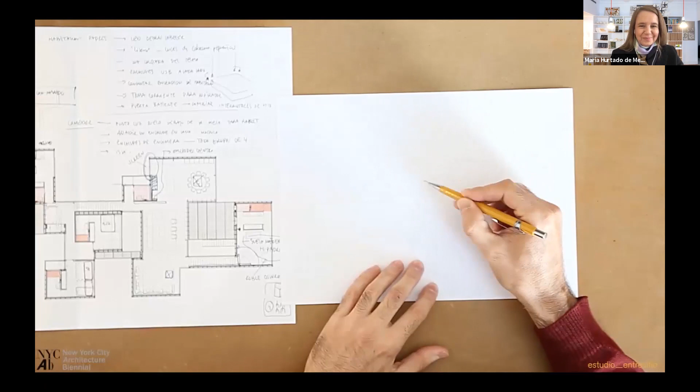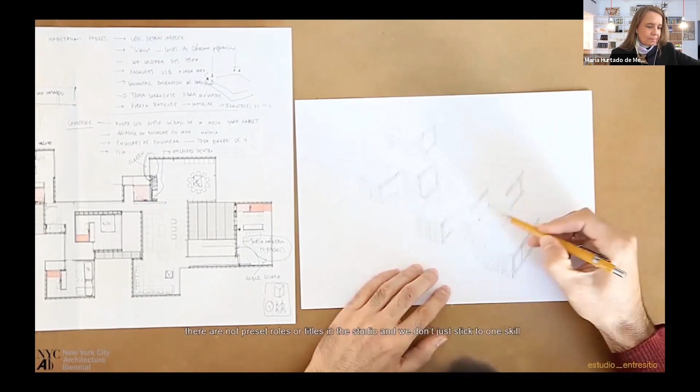Our creative process is non-linear. A common saying around here is that each one is better at doing what they enjoy. There are no preset roles or titles in the studio, and we don't just stick to one skill or way of doing architecture, but embrace all the diverse options the team brings to the table.

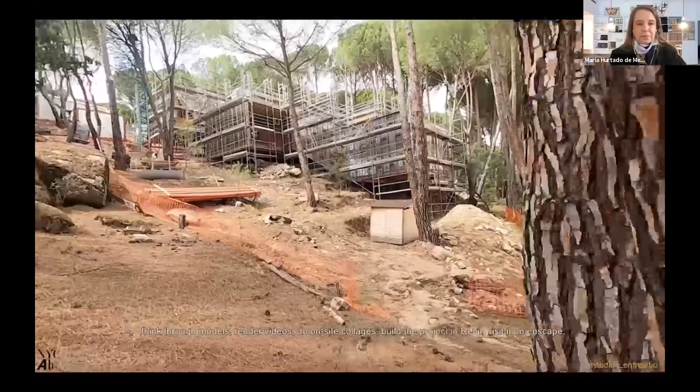We sketch by hand in AutoCAD, check spaces in Rhino, tinker with Grasshopper for complex patterns, think through models, render videos, do on-site collages, build a project in Revit, visualize in Enscape, paint with watercolors, supervise the construction site, check the works, draw again, start and repeat, iterate, think, dream, build.

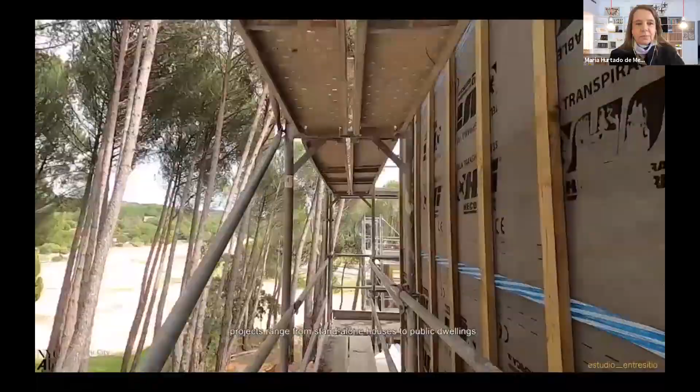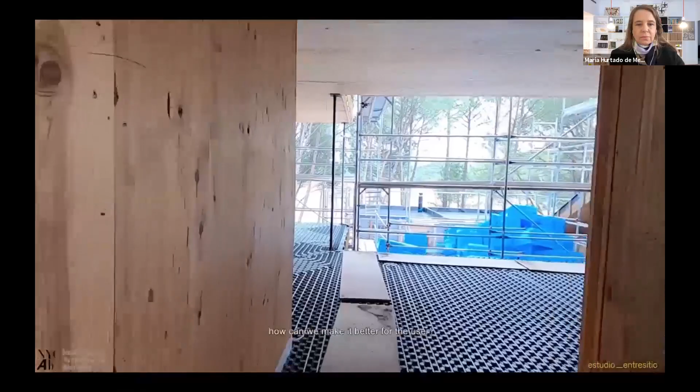Projects range from standalone houses to public dwellings, healthcare centers, social and transportation hubs, and museums. But no matter what we are designing, the principles are usually the same. How can we make it better for the user? How can everyone who uses our building feel welcome in it, as we feel welcome in Madrid? What is the extra thing that we are providing when solving the problem?

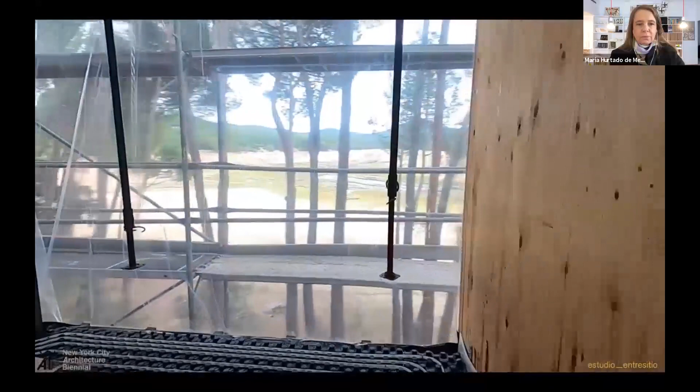We spend a lot of our day discussing ideas, sharing details, talking about what we do, looking to things upside down, paying as much attention to the conceptual metaphor that starts the project as to the ceramic tiling detail on the upstairs bathroom floor. Entresitio is what we've built and what we've dreamt of building, but it's mostly the relationships that have been forged between team members, users, and cities over a long time, a group that has become like family while trying to create unexpected connections and looking for new ways of looking at architecture.

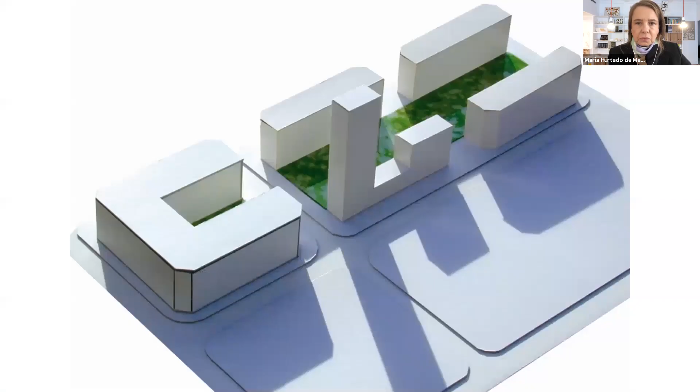In this case, urban housing becomes a reference building that assumes the role of qualifying the urban fabric that was once before qualified by other uses, as we all know. We transformed the given volume of a block into something different. This is the exact same number of square feet, but with a larger silhouette, a kind of non-mimetic contextual approach.

We enjoy working around the relationship between ordinary and extraordinary. In this housing tower, for example, enabling the coexistence of day-to-day situations, such as the regular house window size, with the extraordinary of its placement, which gets rid of known compositional schemes.

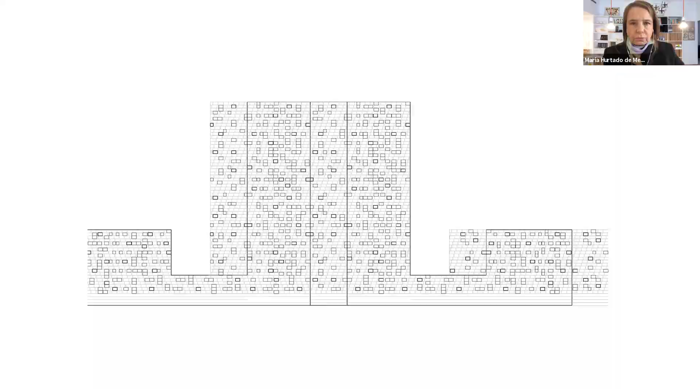Over the horizontal grid, windows are inserted, trying to not reveal the different floor levels. Program is not differentiated either in the envelope. So there is a certain ambiguity in scale. Big and small coexist, besides what cannot be understood, nor big or small. Because it is true that size matters, but small, medium, large, extra large can coexist.

They have to coexist. We actually propose to think every project from the perspective of the body, the room, the building, and the neighborhood.

Housing units in this project are interlaced in plan, and duplexes in the plinth are also interlaced in section. They have two versatile spaces, one upstairs and another downstairs, that cross in section facing opposite facades, and that are able to be used, for example, as living rooms and bedrooms, or offices and working spaces. A funny thing here, maybe not, is that your upstairs neighbor is also your downstairs neighbor, as you see in the model.

Flexibility of uses is the consequence. However, the design intention is the user's freedom. In thinking of programming space, if there is no a priori approach, everyone can make it their own. One does not recognize it as something predetermined that is being imposed. It has no political rule, so to speak. Architecture provokes and facilitates, and it becomes instrumental.

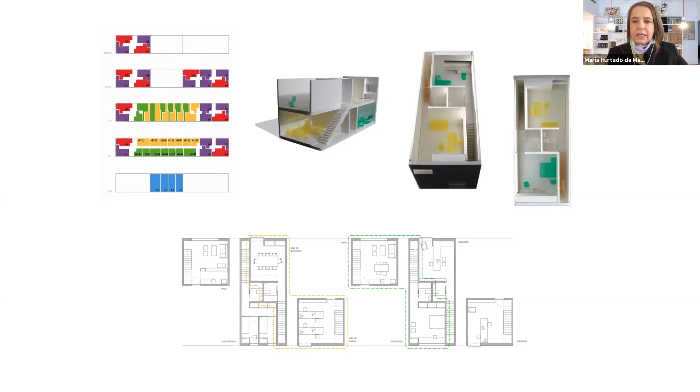Let's think now about this duality, the inside out versus outside in, when starting a project. Because another important aspect of design research in our practice is on method—how we do architecture and what is the support for our thinking during that process.

In relationship to a given context, we seek for clues that operate from outside in, that is context-driven approaches. Or sometimes the site is either too flat, diffuse, or undetermined, which requires an approach from inside out, a kind of bottom-up configuration with aggregation logics.

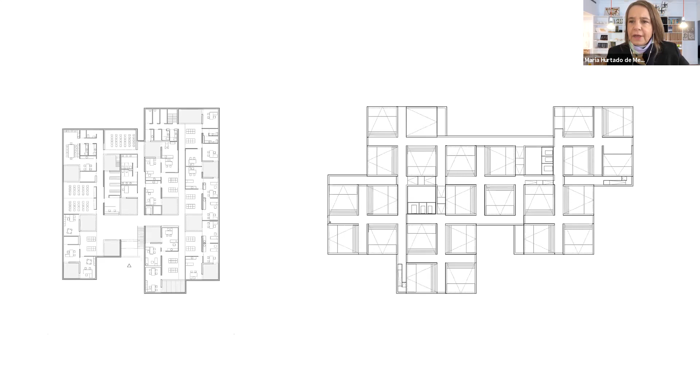So these two projects have in common a bottom-up configuration upon an underlying structure—that is how we like to call it. The grain of the program determines the configuration. That means that the room is the one that rules at this point.

For the museum, it translates into an aggregation of components that are equal but also different, that acquires an identity of its own. As well, for the clinic inside space, the definition of the so-called rooms established a public realm in continuity. Circulation weaves the waiting room, the outdoor room, the exam room, and so on. Light and comfort for the healing.

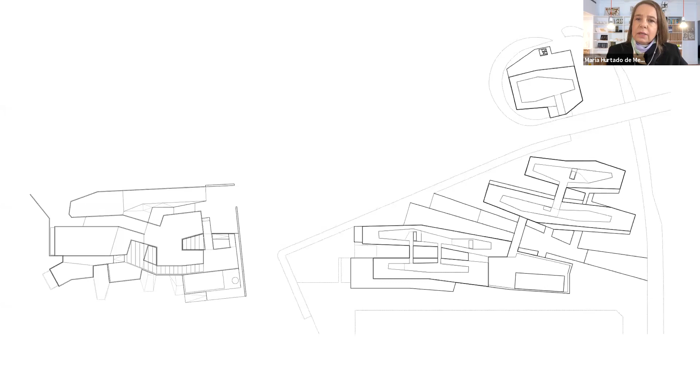And now we look at dispositions that are closely related to site conditions, where rules that operate from outside in are predominant. Like in this family house, it is long and narrow for the long and narrow site. It's an upside down configuration for the slope, filters and permeability for privacy while breathing, and so on.

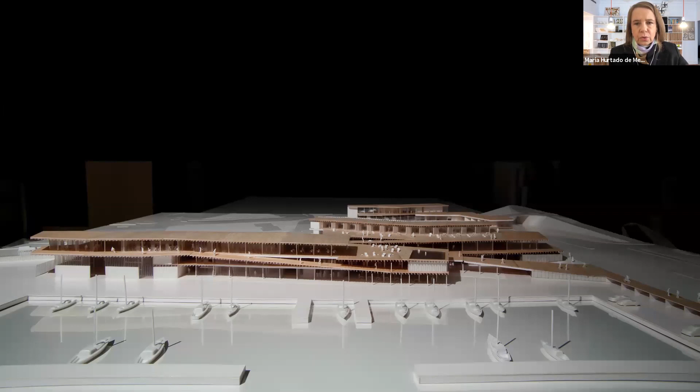And here, the extended infrastructure for the extended waterfront in Mallorca. It is hard to talk about a building as a recognizable piece here. At least in the large scale view, it reads more like a multiplication of the site, all degrees of interiority in continuity, a project with no doors, no barriers, like a neighborhood.

If we think about oversizing, although it is probably the reason why we are not successful in many of the competitions we do, this one time it was the reason for us to win. This is the section for the competition entry for the Museum of Memory of Bogota, about to be built in Bogota, in collaboration with Pacheco Estudio de Arquitectura.

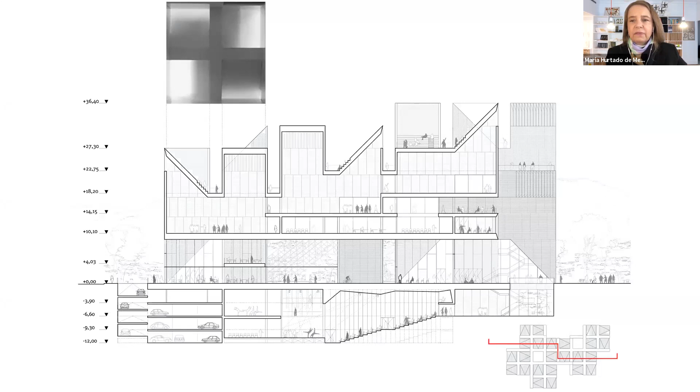We promote the oversizing of the public spaces, a strict compliance. On the one hand, we do a very strict compliance with the required programs, and then we enhance the generosity in the connective tissue. In this case, through sectional thinking, the open public space on the ground floor acts as a public forum. It is an 8-meter high ground floor that becomes a shade and also an umbrella for the users, with the city percolating seamlessly throughout.

But we can also oversize the verticality. Although working at high levels of abstraction, sometimes the architectural response can become a clear presence, and we embrace that opportunity when it comes.

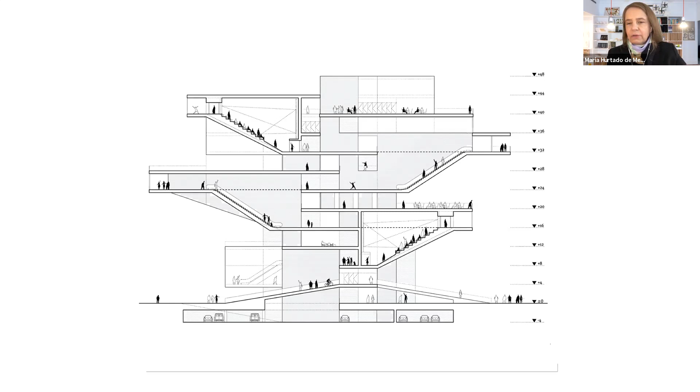We do. Projector is a vertical movie theater, but is more than that too. It is intended as a projective device, a vertical public space through which the viewer travels the entire building, and seeing a movie becomes an opportunity to discover all the rest of the areas of the program along the tour.

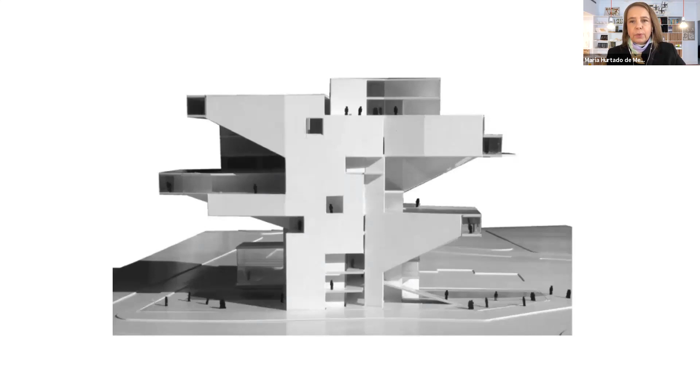Altogether, the approach produces a decomposed building where theater halls are identified from various points of the city and produce multi-level urban balconies. In this span between camouflage and identity, we enjoy Gombrich's words when he talks about marks or badges that make something conspicuous, as in illustrious or visible or outstanding.

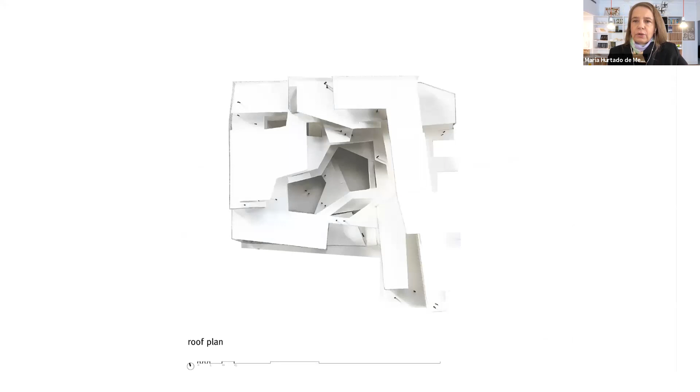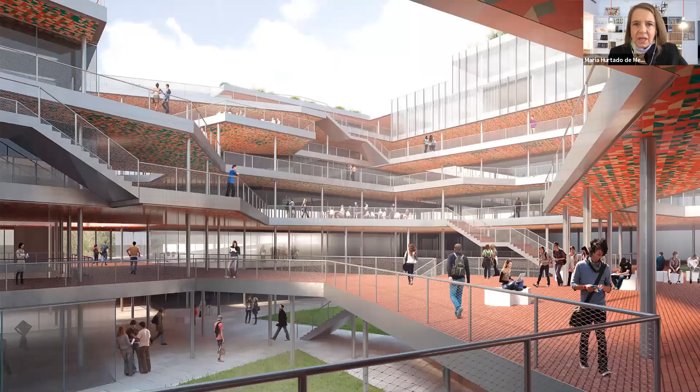Another public space, this time for a university, also in Bogota, together with Pacheco's office as the movie theater before. Oversizing circulation here, programming circulation, redundancy in circulation. This is a project of horizontal plates, and the underside of those plates are the space-making elements. There's no emphasis at all on the vertical.

One of those context-driven projects that takes the movement of the user as the driving force.

If we speak about no hierarchy, we can see that similar to what we saw in the housing tower at the beginning, there is an intended ambiguity in the definition of front and back of a building as an urban object, also avoiding a kind of big difference between left and right. The building is perceived as a living environment—from all sides, you could arrive.

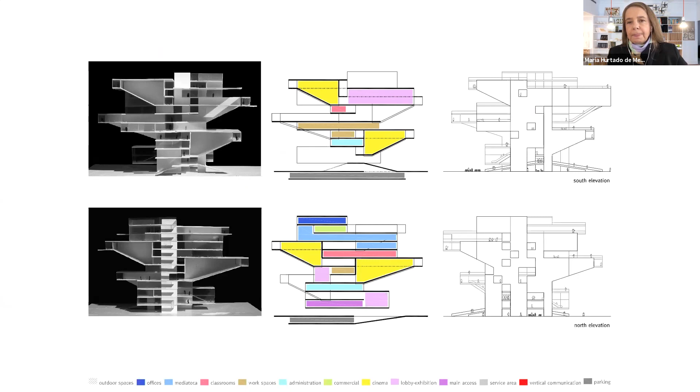For the museum, a building mass with no clear front or back avoids frontality. All the ways to approach are the right one. Formal autonomy is enhanced by its dimension, by the fact that you can recognize yourself being in and out, on and under, hopefully arriving to that difficult whole that Venturi talks about in Complexity and Contradiction, and that we always pursue.

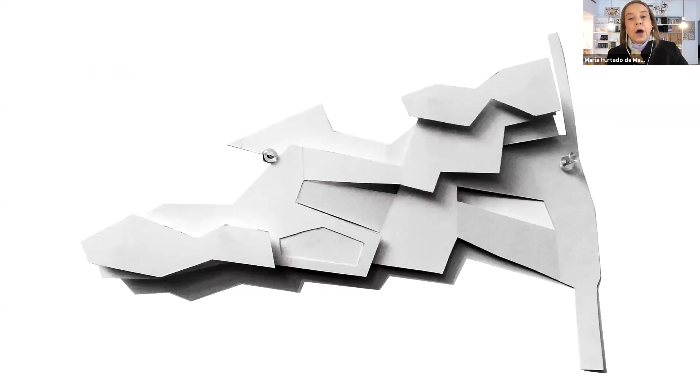Formless is as in not being informed by a legible geometry. That is one interpretation: to fringe or flake the perimeter, something very extensive, with the ambition of becoming an infrastructure anchored to the edge of the site.

From outside to inside, the idea is of the will to cross, the duplicating of the ground floor, a kind of folding, doubling the opportunities for the public space to exist.

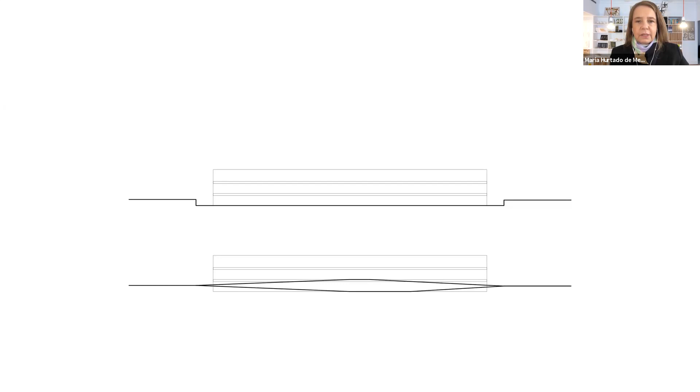But formless also as in having no appearance. We are interested in the potential of divesting of things. What means for architecture the lack of something? These kind of soft resignations of architecture.

What means to be frameless or detailless. This is the roof of the house. Indeed, it has no presence, not even from Google. The kind of camouflage we have been talking about, to the extreme.

But what about if we think of an endless space with no end, double circulations, like the acknowledgement of the place beyond and beyond, the dissolution of filters, of limits. We see here inside the museum rooms a diagonal relationship between all of them in clear visual continuity.

The space doesn't have an end. One is at the same time a bit overwhelmed, but also intrigued. The relationship between rooms, as intense as it is, does not compete with the spatial integrity of each one.

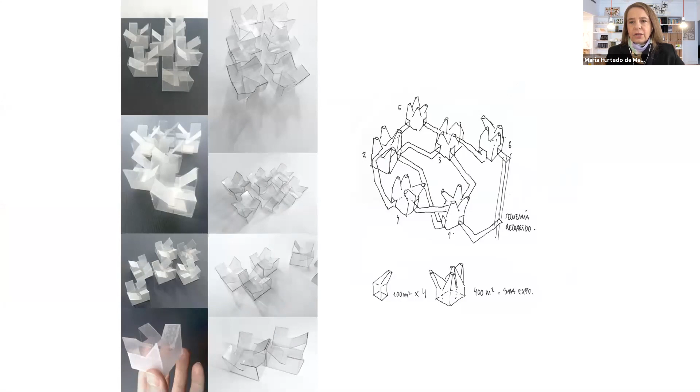Endless also as in the intuition of an outside, tensioning the space through the use of light. This museum works with the relationship between the one and the multiple, starting from the definition of a module based on the dimension of the typical exhibition room of 400 square meters, and the logic of aggregation through circulation. Redundancy in circulation, again, no obligation, no beginning or end, and something that is potentially an endless extension.

This is a slightly unusual office space. This is the paradox: the program is very important, but once it is translated into space, it is not that important anymore, which means that for a certain functional program, we are interested in understanding what the spatial needs require, like in terms of lighting, ventilation, privacy, the static versus dynamic. And once that is understood, the space has a life of its own.

We are interested especially in this kind of double condition of enclosure and infinity of space, not having the certainty of where space begins and ends, and the simultaneous perception of the here and the there. But also, why not the coexistence of things like privacy and light, or the possibility of thickening the limits without density as a cushion, or a distance without detachment from the public streetscape. A fuzzy boundary that provides an atmospheric condition.

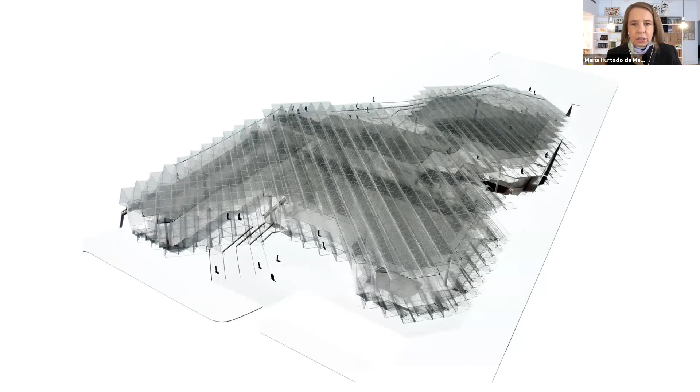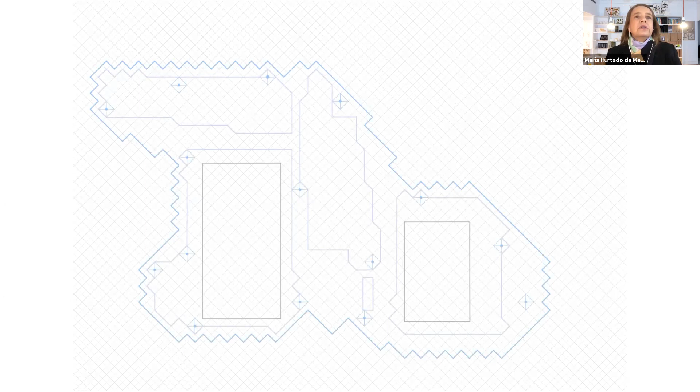Here we have the lattice and courts and enclosures to the grid, the space frame projection to the grid, and now adding the frame supports to the grid. This is the resolution of the plan to the grid, shown here at the upper level.

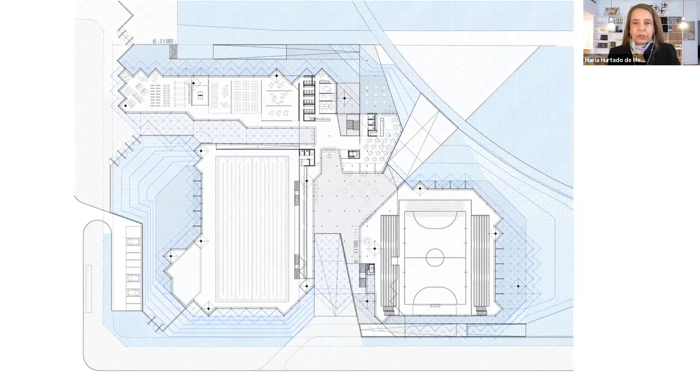We see the outdoor in blue and how, for example, bikers and runners in the park can slope through and over the complex, and also how at the entrance level pedestrians can cross through the building. The entrance becomes a new door to the park, a place of encounter, and the light presence of that complexity gets dissolved into a new place.

But talking about architecture, we don't have to explain it all, right? Architecture does not need to be understood to be inclusive. There is some attraction for those things that are not revealed, the kind of secret codes, whatever is implicit or connotative of architecture. And sometimes indications are not needed to understand where the tension of space leads you to.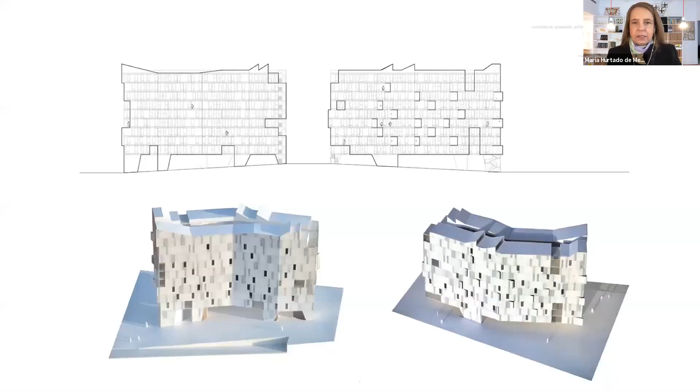Or, for example, this is something we enjoyed a lot. This was a competition for housing called Dogfish. So one side of the building looked like a dog and the other for the fish, but only for those who knew, because otherwise you would just see a building.

But couldn't it be great to know that you live in the eye of the fish, or that you live in the dog's belly, second door to the right, for example.

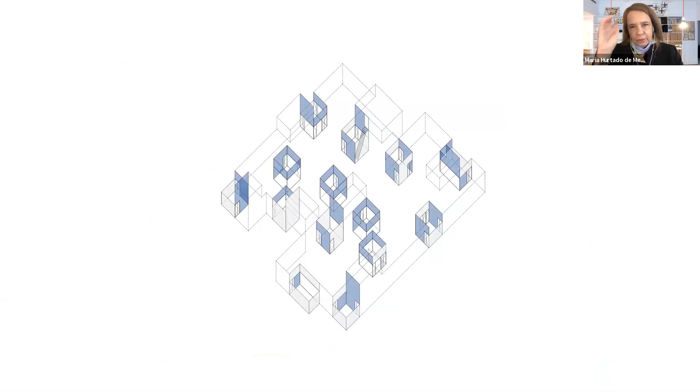But also subliminal is the difference between a set of spaces, all similar but all different — the idea of variations with repetitions. In the clinic, there are no identical patios amongst the 14 of them due to material and structural reasons.

And these differences don't belong entirely to subjectivity. The rules are only that load-bearing walls and the outer shell are concrete, and the rest is not. It's a very simple rule, but we really let each patio be however it needed to be, according to the rules — a decision-making strategy based on a process that is open to the surprise of what is not foreseen.

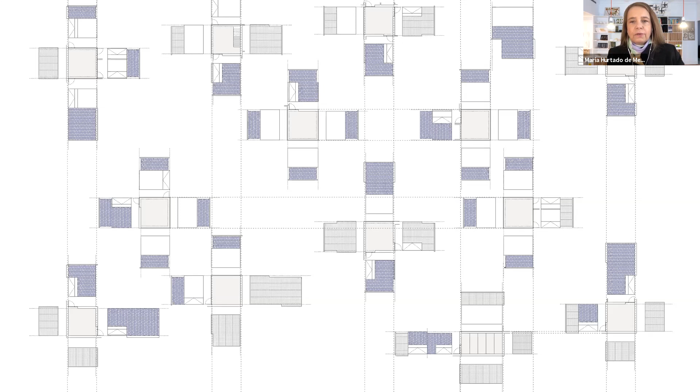This is maybe a kind of ambiguity in the definition of spaces that are, however, so easy to appropriate by anybody. And this is all we have to say for today. We believe in architecture and architectural design as the natural field for considering inclusion. It has the potential to reach where other fields can't, in making our living environment fair and happy places for all of us. Thank you very much.

Maria, thank you. Thank you for your remarks and for those amazing images. Thank you for the video that showed your office and the team, listing all the players, all the team members in the office. Extraordinary — what you've achieved is remarkable.

I remember you saying at the Center for Architecture when you spoke there a decade ago or so that your studio wins, in general, 1 out of every 10 competitions. And then you said you knew you were going to win the next one because you had not gotten a commission from the last 9. So statistically, it was obvious.